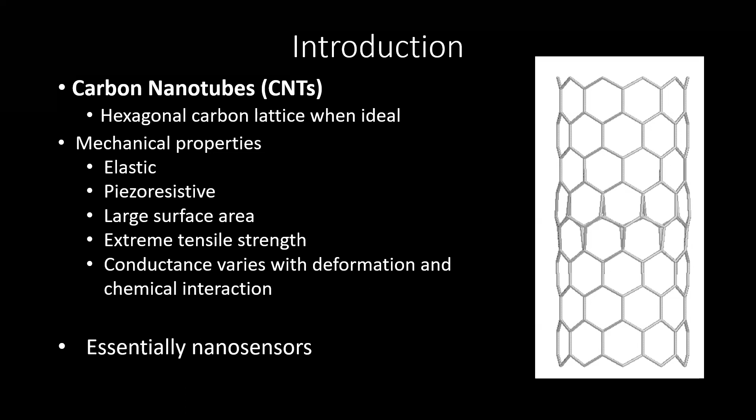They can also be arranged into large surface areas with even distribution, imbuing their characteristics onto large structures. They have great tensile strength, practically an engineer's dream, as they are almost impossible to break in tension. These qualities work in tandem to make them into inherent sensors. In the paper, the method of measuring their internal electric characteristics as they deform will be used to indirectly measure their deformation.

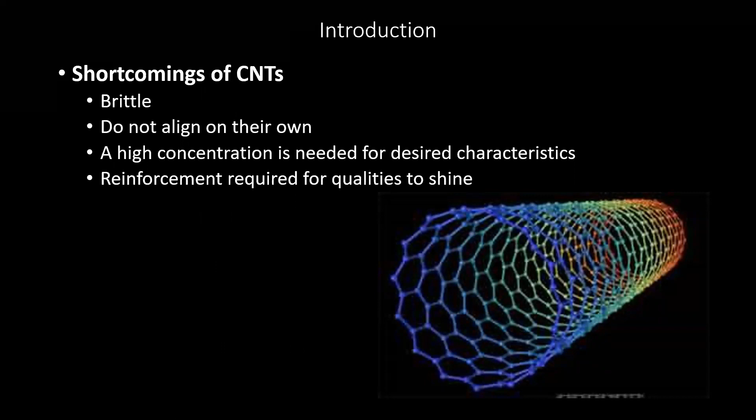CNTs are not without their issues, however. They are brittle and prone to fracture under non-tensile stress. They do not align on their own and require a material to mesh into, and a high concentration and even dispersion is needed for their talents to truly show themselves. This paper broaches the idea of creating a CNT composite that is flexible enough to undergo great strain while also still maintaining a high enough concentration of CNTs for their inclusion to be worthwhile.

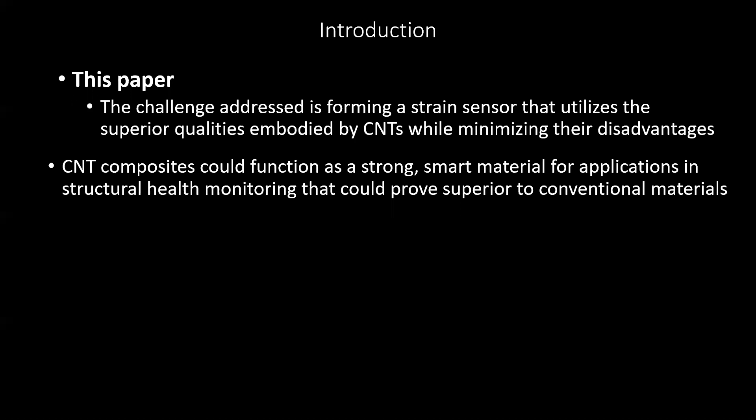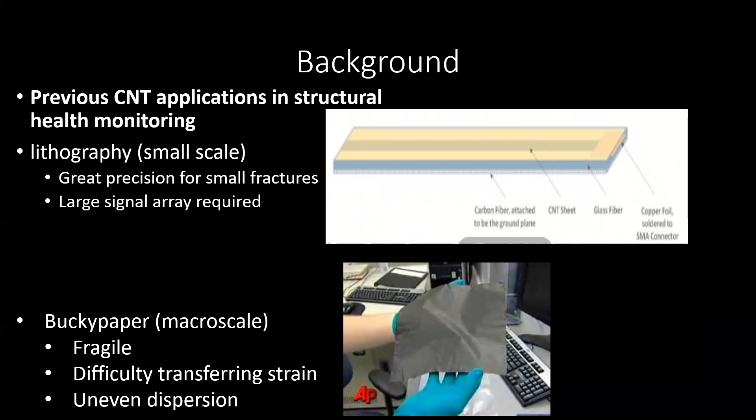CNTs are used in structural health monitoring already, but mostly in research atmospheres. One of the methods is lithography, when the material having its internal strain monitored is sandwiched between layers of CNTs. The disadvantage here is that the method is very hands-on and requires a large and expensive signal array to maintain. Bucky paper is another material that is used for this purpose. It is essentially a sheet of forcibly aligned CNTs with no mesh, meaning that many of the flaws in CNTs are not compensated for and they remain brittle and ineffective outside of niche circumstances.

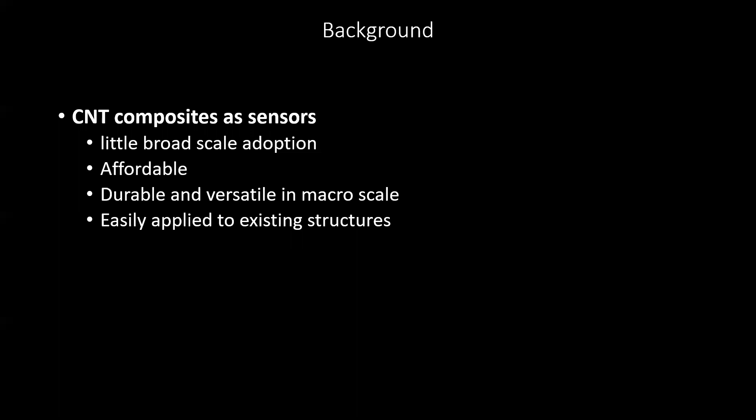CNT composites have been tested for structural health monitoring in the past, but they have yet to reach their full potential or widespread adoption. These composites could be cheap, versatile, and be very easily attached to existing structures if the right method and configuration was discovered, which is what this paper sets out to do. It wants to create a CNT composite with CNTs as the matrix and a polymer as the reinforcement.

The two types of CNT samples created in this paper were a control Bucky paper for comparison purposes and a CNT composite. Bucky paper is fabricated by essentially hand mixing or sonicating lots of CNTs into a solvent and then evaporating the solvent away, leaving a thin film of concentrated CNTs.

The unique CNT composite that was created by this group for this paper utilized different concentrations of CNTs as a matrix and had a reinforcement polymer with a name I won't even try to pronounce, shortened to PMMA. This was done by mixing the solution of the two with a drill and curing multiple times until the composite was in a stable, dry state.

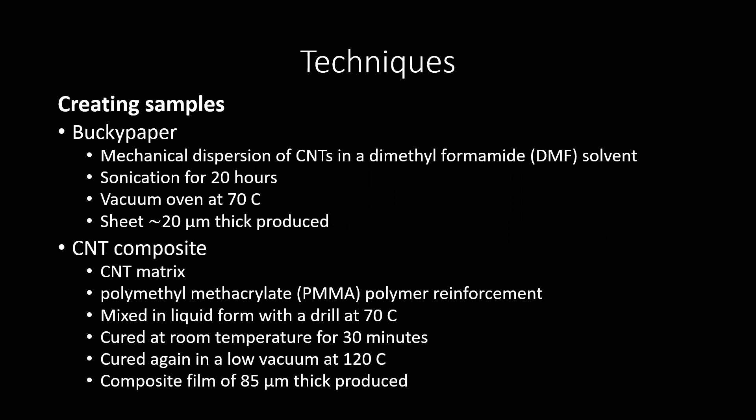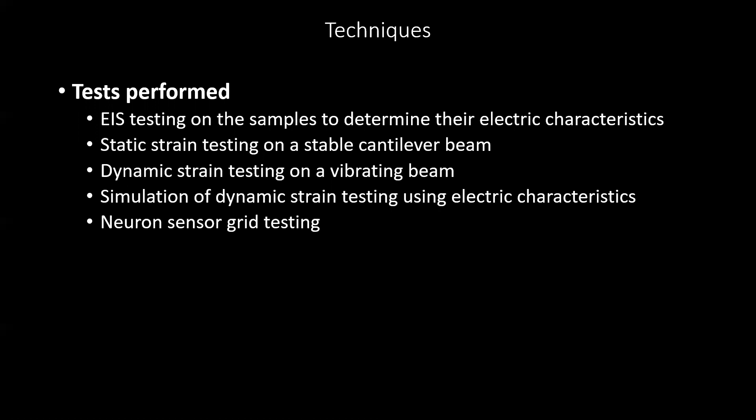This is a brief overview of the tests done in this paper. They performed EIS testing on both types of samples to determine their electric characteristics for simulation. They stuck the samples to a cantilever beam and performed static strain tests. They then performed a similar dynamic strain test, only now they vibrated the cantilever beam. And they simulated the dynamic strain tests using their EIS results, and they applied a neuron sensor grid to a vibrating aluminum beam.

EIS stands for Electrochemical Impedance Spectroscopy. They tested their segments of Bucky paper and squares of CNT composites. EIS testing is done by fashioning a cell out of CNT material as a working electrode, a PT plate counter electrode, and a reference electrode. The cell then has a variable AC potential and a fixed DC potential applied to it, and its characteristics were recorded. These results were then used to create an equivalent circuit for later simulation.

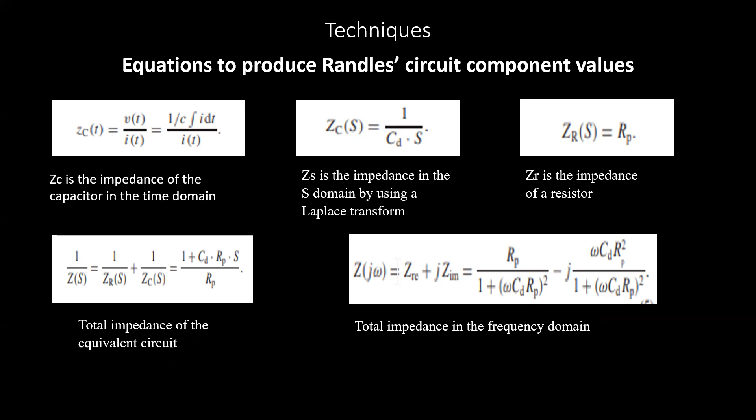These are equations they use to determine these electric characteristics. I won't go too in depth on these because it will make more sense later when we cover the results of the EIS testing. They essentially calculate equivalent component values for the sensors if they were to be put into a circuit.

The next test performed was the static strain test. Bucky paper and CNT composite sensors were adhered to a cantilever fiberglass beam and vacuum bonded to reduce slippage. These samples were then wired with a silver epoxy and a load was applied to the free end of the beam. When the beam reached maximum deflection, the internal resistance of the sensors was recorded.

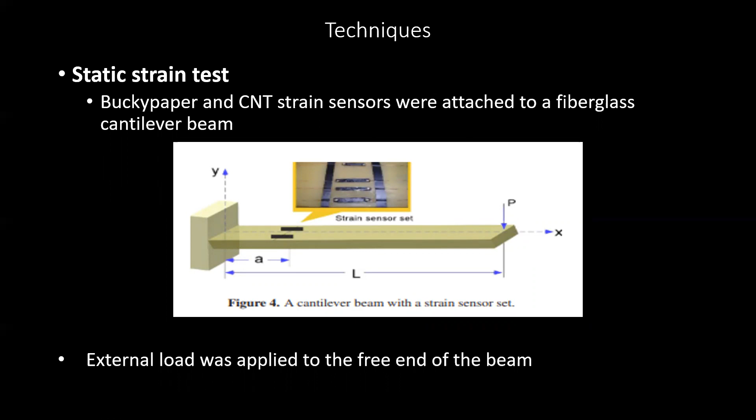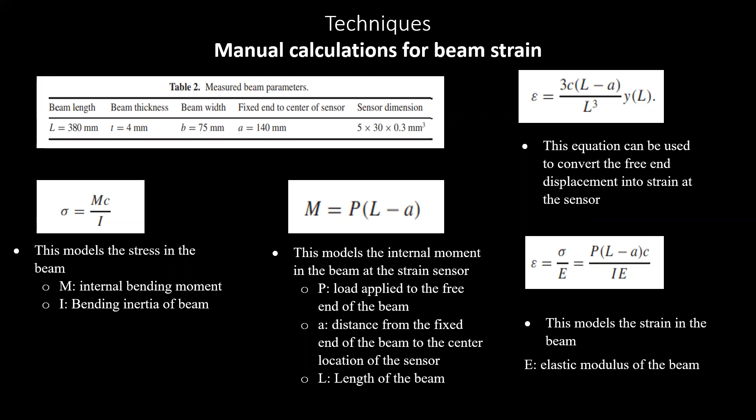These are the beam theory equations used to calculate the actual deflection for verification. These should be very familiar to anybody that's taken solid mechanics, as they're pretty much standard in any questions that ask about cantilever beams. They then performed resistance calculations to convert their resistance values into strain values.

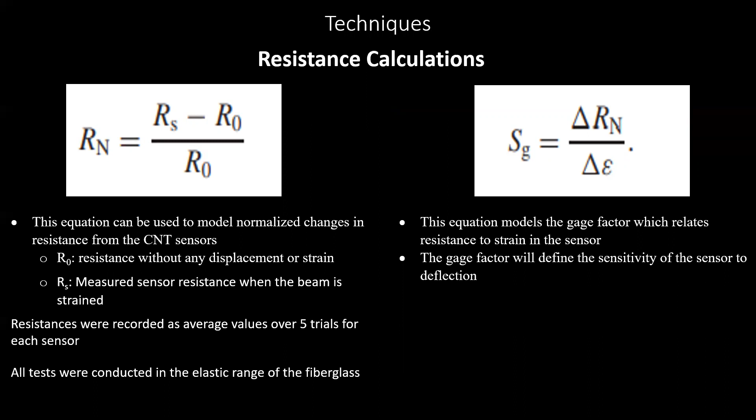These tests were done 5 times for each of the two different types of samples. The equation on the right, gauge factor, describes the sensitivity of the sensor, while the equation on the left describes normalized resistance. The test performed next was a dynamic strain test. This test was much the same as the static strain test from before, but with more elaborate equipment to record the variable responses from the sensors.

This time, after the maximum load was applied to the free end of the beam, it was released and allowed to vibrate freely as results were recorded. A laser displacement sensor was used to measure the actual displacement for verification.

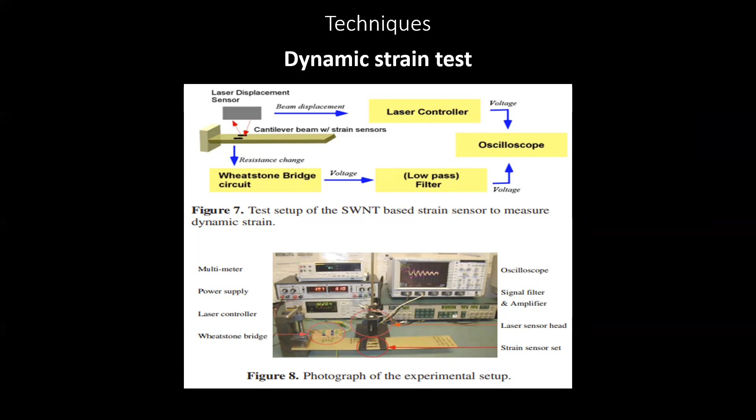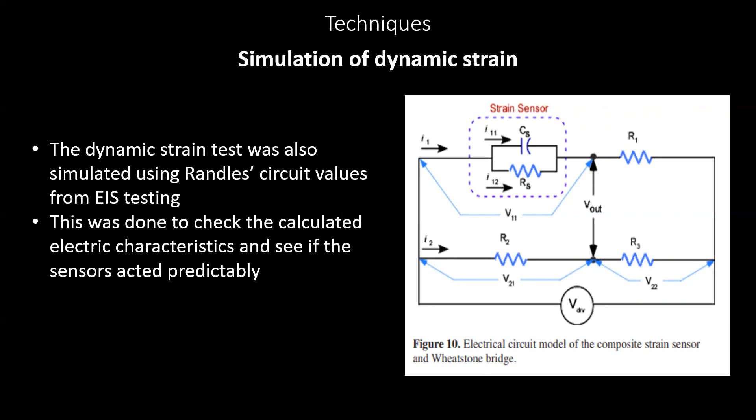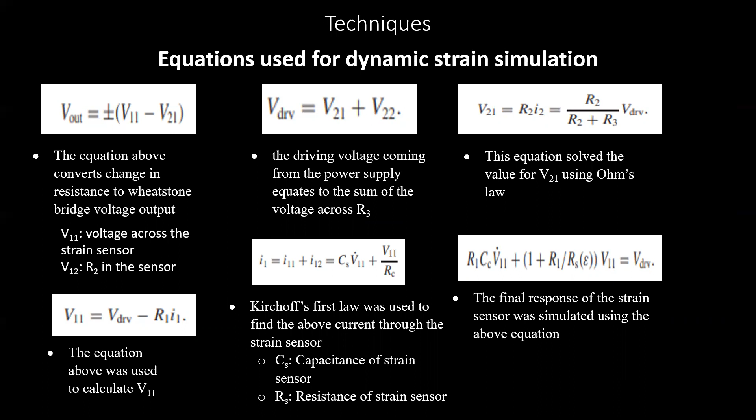The next test performed was a simulation of the dynamic strain test with a Wheatstone bridge assembly. The EIS values were used in calculations here to see if the sensors acted predictably enough to be designed with different types of work environments in mind. These were the equations used for the dynamic strain simulation to convert the resistance values of the sensors into voltages for the Wheatstone bridge. The last test performed was a neuron sensor grid.

This experiment could yield the farthest reaching application, as a neuron sensor grid is essentially an array of sensors that can be broadly adhered to existing broad surfaces like bridges, cars, and planes. A particularized version of the composite was sprayed on an aluminum cantilever beam and sealed with insulation. A current was then run through the beam to detect resistivity on the neuron grid.

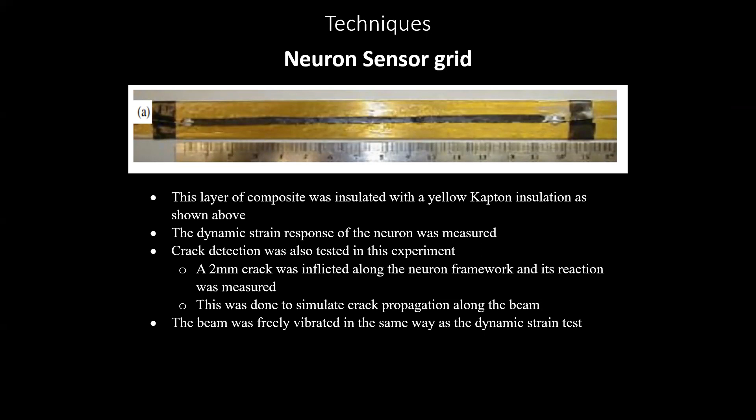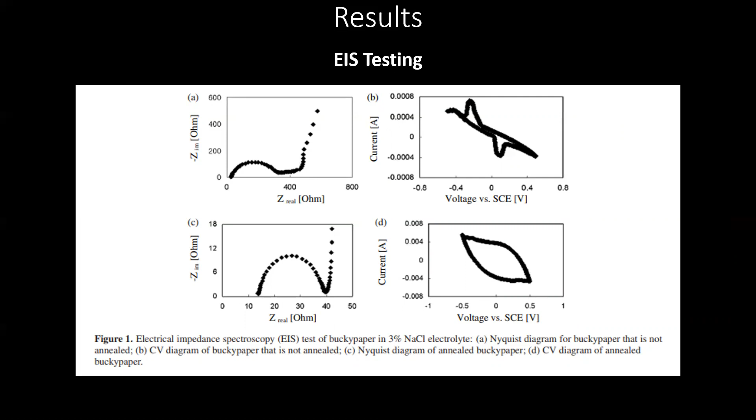Finally, the beam was dynamically stimulated with a load at its free end and released to vibrate freely. In the second trial, a small perforation was inflicted on the beam to see if the array could detect not only the vibration, but also the fracture. Moving on to results, these are the graphs yielded by the EIS analysis. This data was used in the simulation test.

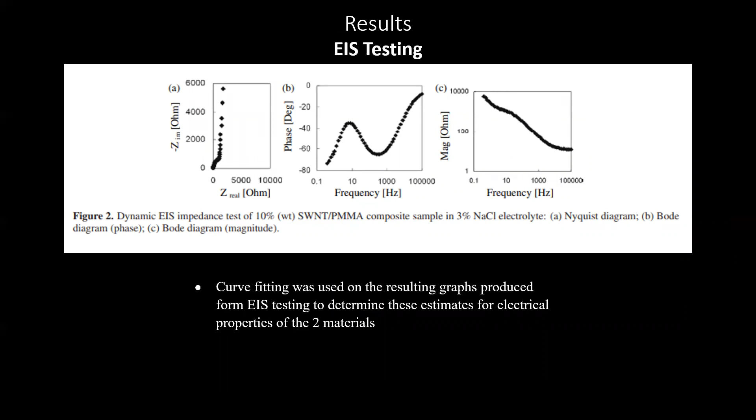The polarization resistor value would indicate how well the sensor would resist fatigue and corrosion. The double layer capacitor would indicate the ability of the sensor to withstand charge and give a more reliable reading. And the Warburg coefficient did not end up being consequential in their calculations.

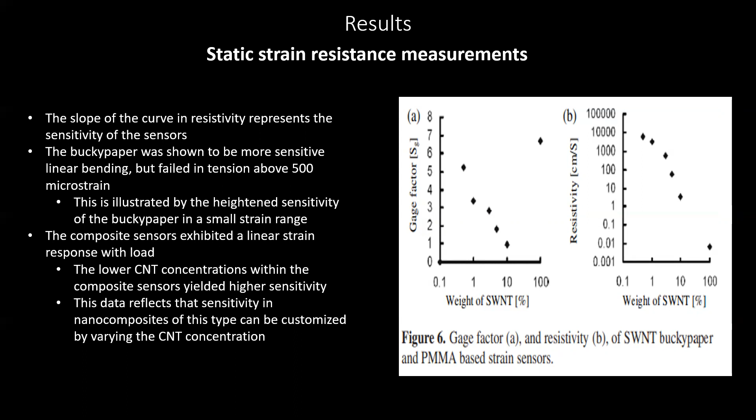These were the resistance measurements from the static strain portion of the experiments. While Bucky paper was more sensitive, it could not withstand the microstrain above 500 before fracturing, as it was very brittle. The CNT composite showed decent sensitivity, but most importantly, it exhibited a linear strain response with load, making it more reliable. These are the strain responses from the sensors.

As you can see, the Bucky paper entered inelastic deformation before 500 microstrain. You can see the yield curve there. The linear strain behavior is illustrated here by the CNT composite, and as the CNT concentration went up, less strain variation was detected.

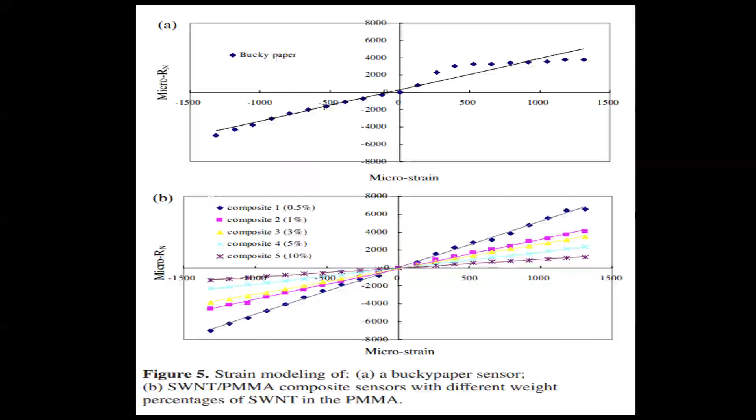These are the resistance measurements from the dynamic strain test. While the Bucky paper was way off the mark, the CNT composite mostly agreed with the real strain recording. This shows that the CNT composites can be used to detect deformation in a moving body quite accurately and reliably.

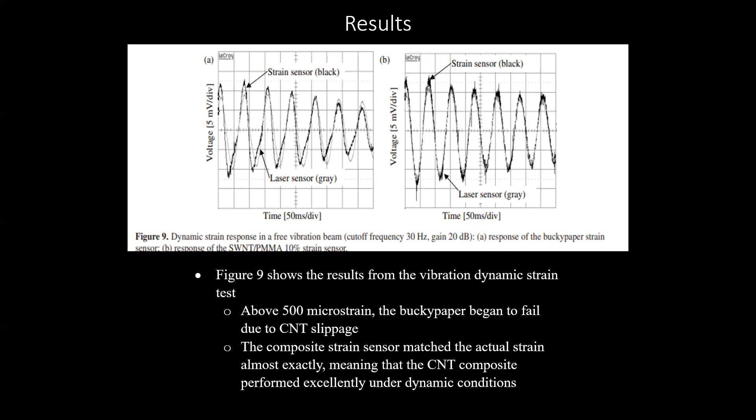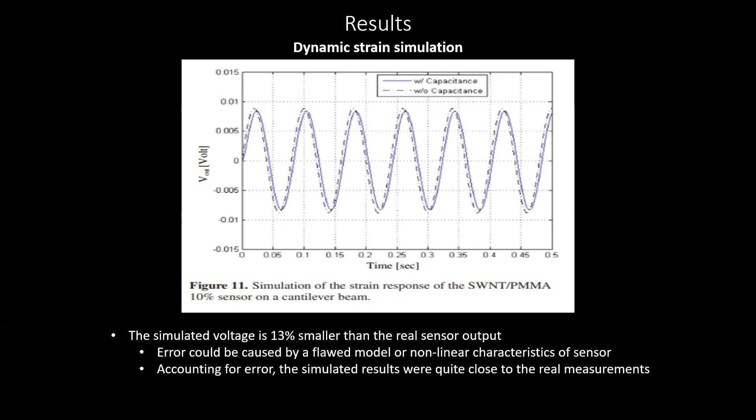These are the results from the simulated dynamic strain test for the CNT composite. While there is some error, it's explainable by minor factors that could likely be produced better with future iterations. The similarity shown between the real sensors' recordings and the simulated recordings shows that the CNT composites can be customized before construction to produce better results with specific environments in mind.

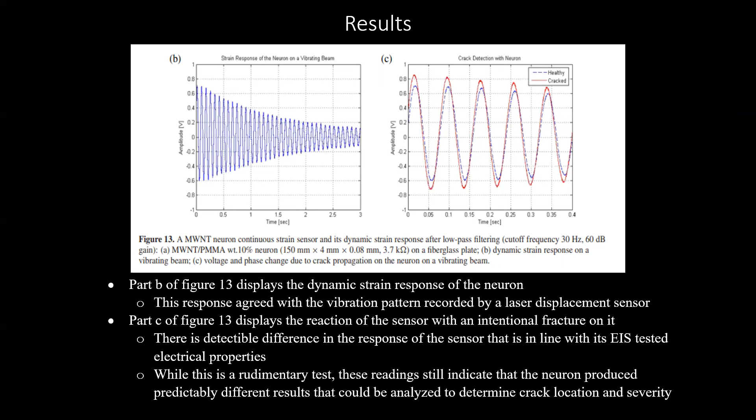These are the results from the neuron grid experiment. A CNT composite of 10% concentration CNTs was tested in this experiment. The figure on the left displays the readings for the displacement, while the right displays the resistivity of the damaged aluminum bar. Again, the composite is remarkably accurate in replicating the vibration of the aluminum bar. There is also a detectable and predictable change in resistivity with the fractured bar, showing that the neuron grid can reliably detect when there is a fracture in its structure.

Finally, in the conclusion, these experiments in this paper show that the CNT composites can detect not only deformation, but impurities in their assigned structures. Bucky paper was shown to only be effective in narrow applications, proving that with enough research and implementation, CNT composites will be superior and the most popular alternate method. The characteristics of the sensors could also be predicted and therefore designed for specific circumstances. CNT composites with future experiments have great effects on structure and could even have applications in skin-adhered sensors.